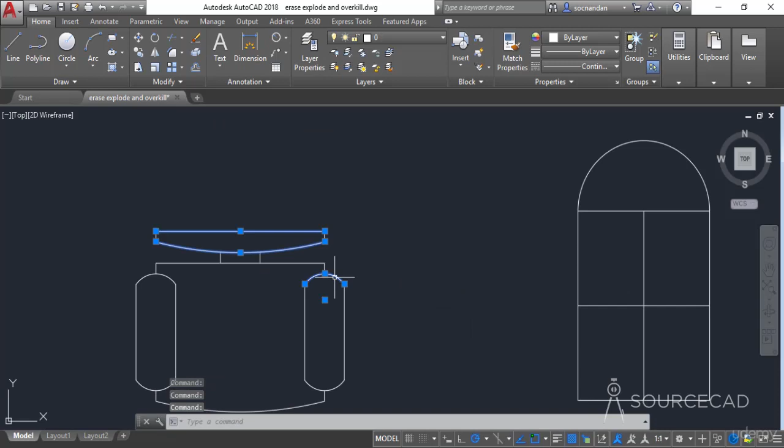Now move to this object, and you'll notice it has been reduced to its separate units. We can now select all of these objects separately, even though it was a block initially.

In a similar way, if you click on this rectangle, you'll find it's completely a single polyline with 4 different line segments. But you can also explode this geometry to reduce it into its simplest form.

So once again, select the explode tool, click on this rectangle and press enter. Now when you click on this object, you'll notice it's a single line segment, and similarly all the objects have been broken down into their simplest segments.

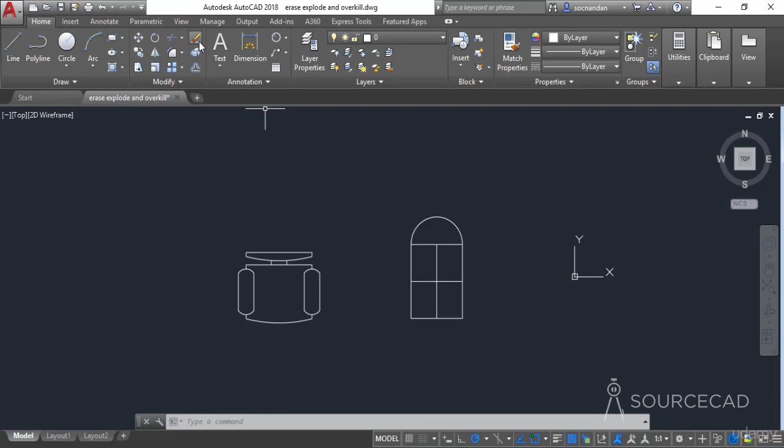In order to erase any of these objects, you can select the erase tool from the modify panel, then select the complete set of objects and press enter. That will erase the objects.

Or you can use the alternate method of selecting the objects and pressing the delete key on your keyboard. There's also one more method: simply selecting the object and deleting it from the right-click contextual menu. So you can select any of these options for erasing an object.

When making any drawing, there will be conditions where you'll create some overlapping geometries. For example, here we have a simple geometry made with single segments everywhere. But what if we need to make some overlapping geometries?

For example, I've selected the line tool, clicked at this point, and now I need to take reference of that point, so I click there. From that point I need to select a distance of 60 units, so I'll type 60, press enter, then move upwards and enter a distance of 150 units, press enter, and now join it with this point.

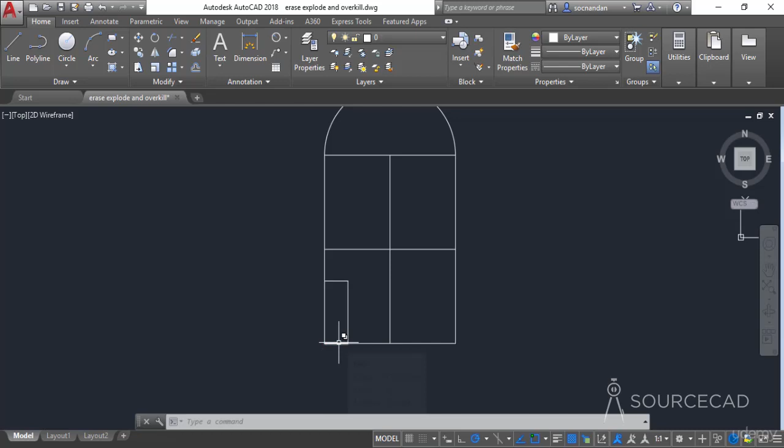So now we have an overlapping line here, above this line, and in a similar way there may be situations where you need to create many overlapping geometries. You can manually remove those overlapping geometries, but that will take time.

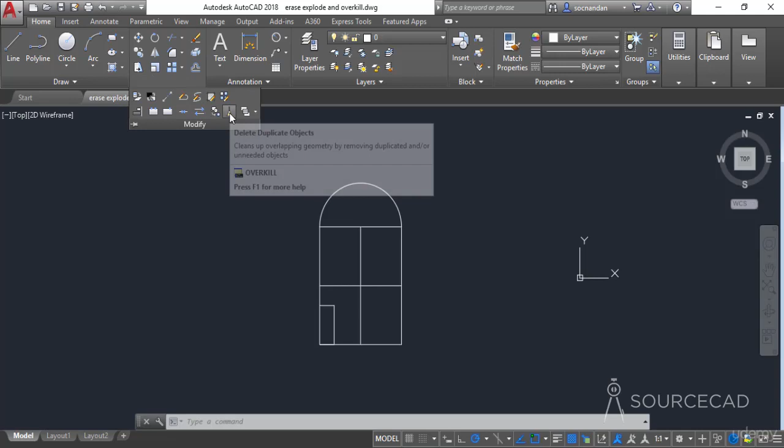But there is a direct method in AutoCAD to remove all overlapping geometries, and that's overkill. Go to the modify panel, expand it, and select the overkill option. You can also use its command equivalent, overkill, then select the complete set of objects and press enter. Don't change anything in this window, simply click OK, and now we don't have any overlapping object here.

So now if you click here, you'll see that we only have a single line. Similarly, if there were any objects overlapping any other object in this drawing, those would also have been removed.

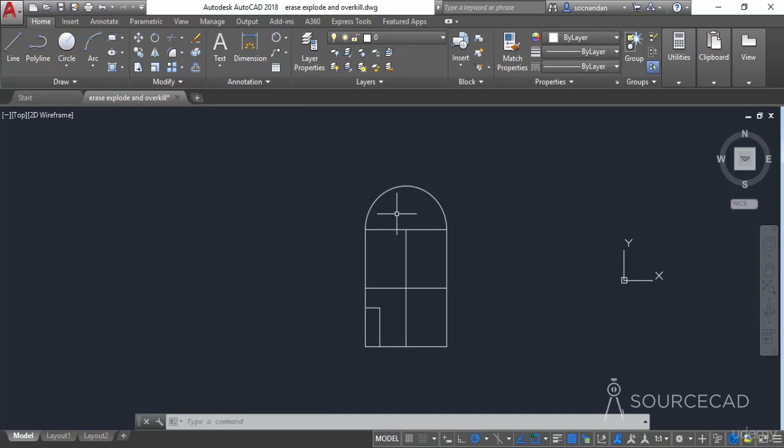So this was all about the erase, explode and overkill commands of AutoCAD.